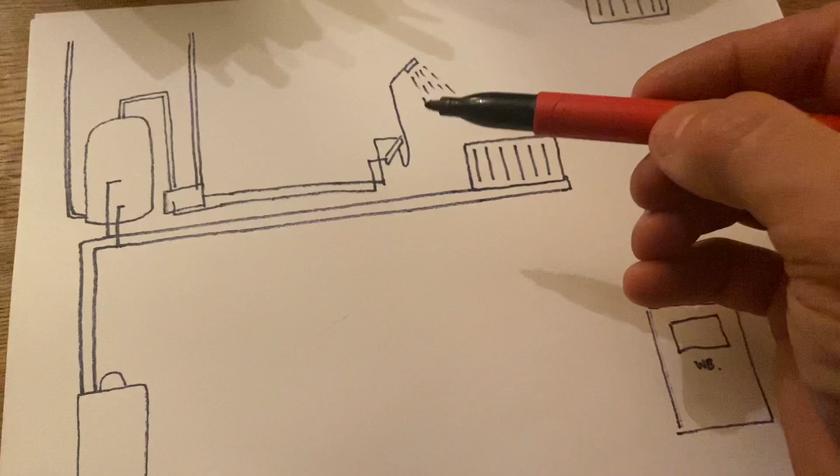This hot and cold here are going to pick up the hot and cold pipework which is in the room below, in the kitchen basically, off the new boiler. Now, rather than take the flow and return all the way through the house, which was quite a long way, to connect on with the heating circuit here in the airing cupboard, we took them from the boiler to connect onto these two pipes here. If we imagine we cut them there and then connected these two onto the hot and cold water in the kitchen ceiling below, we've then got these two pipes that are unused going all the way to where we need them in the airing cupboard.

So we took our flow and return from the new boiler, if I can draw this - it was closer than that, but into our new combi. So that's central heating, flow and return, picking up these two that used to feed this shower into the airing cupboard. This pump goes, and then these two here just connect onto the heating circuit where we need them. So now we've got our central heating circuit from the new boiler coming along and connecting into our existing heating circuit.

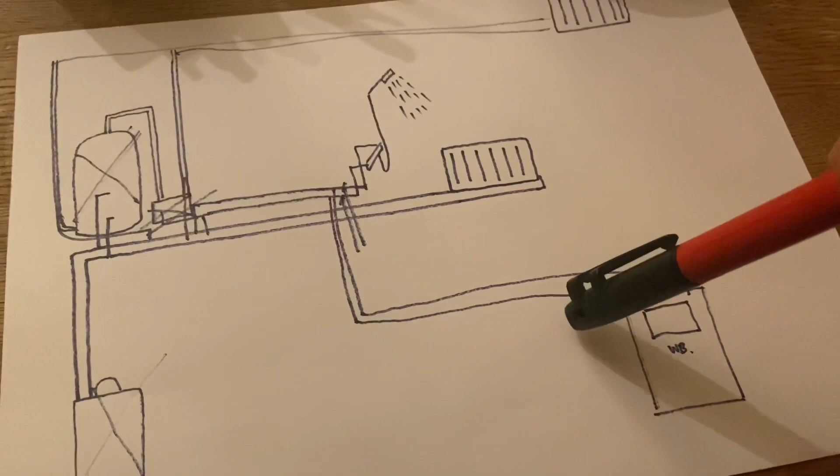Right, ignore this drawing for now. This will all get explained later on in the video. What I wanted to say, and what I missed off the intro, is that I did a live stream from this job when we started it. So the first half a day where I was explaining the job from the start is on that live video. This video starts a little bit into the job, so if you want to see that once you've watched this video, I'll put the link to the original live stream in the description, and then you'll get the whole job.

Hope that makes sense. So I'm just having a bit of a look at where the boiler is going to sit on the floor. It has to go on a flat level surface. I've marked it out roughly where it's going to go, but you can see the level's way out, sitting up about at least 10 or 15 mil. So we decide now whether we put a slab on it or whether we pack the jig off the floor.

And that's because the boiler rolls onto that jig and the pipe connections are on the floor, aren't they? So exactly, it's got to be... If it's not sitting square, what it means is as the flue goes through as well with its natural fall, it will mean that we'll have to accentuate that fall even more, because we're actually going to be going out like that. So we have to be a bit careful what we do.

It might be we've got enough height, haven't we? It's just set a slab, I guess. Yeah, so the pipe's going to come out the back of the boiler up.

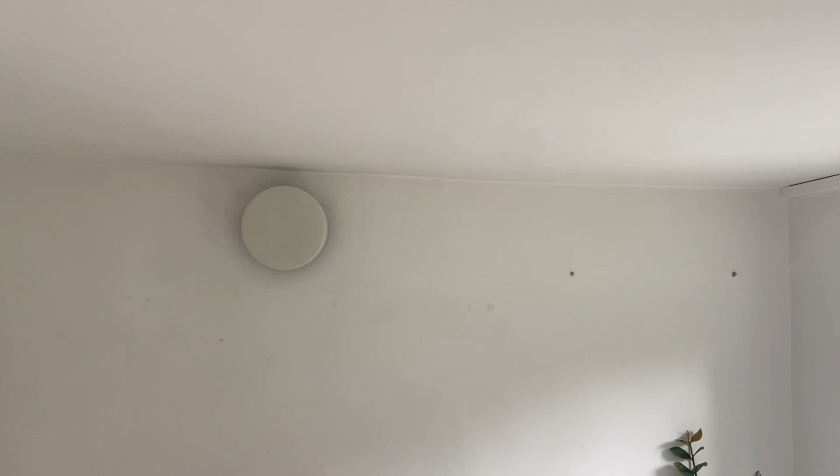We're going to pin them to the ceiling, that's what the customer wants. We're just deciding whether we come straight down the middle and use brass hospital clips to make it look nice - maybe she'll think of it as a feature when she sees how nice the pipework is - or keep it to this side because she's already got some pipes here, and then she can box it all in.

But yeah, we've basically got to come across, because this is a flat roof, across and through, to get us up into this void, and then we can pick up all our pipework, heating and hot water from the bathroom above.

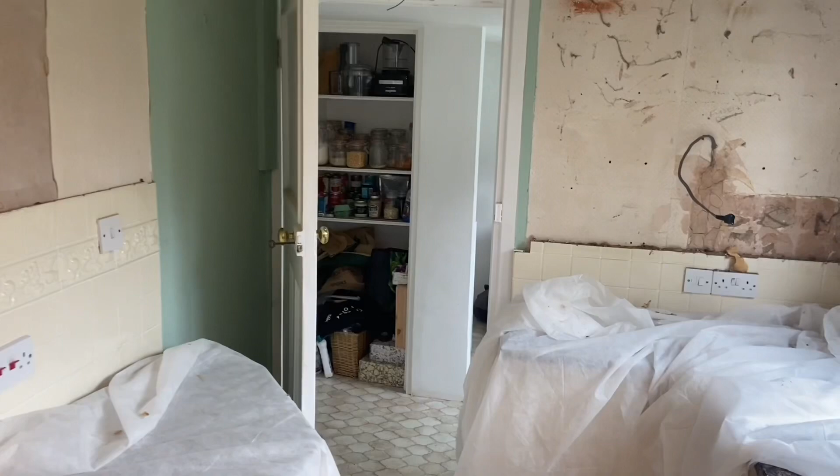We spoke - obviously this kitchen's going to be huge - about different locations for the boiler. She didn't want it anywhere in this room. Her bedroom's the room above, and she didn't want any noise because she says this boiler keeps her awake at night or wakes her up in the morning. So she wants it in that room out of the way. Obviously it's a flat roof, so there's nowhere to take the pipes, and that's the solution we came up with.

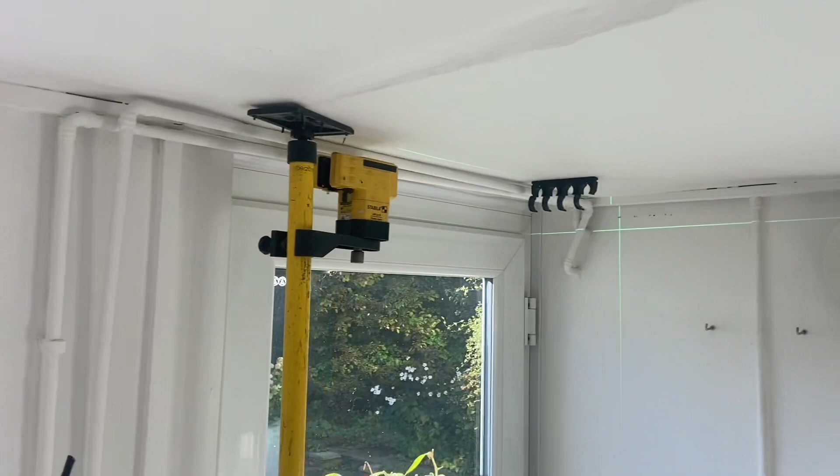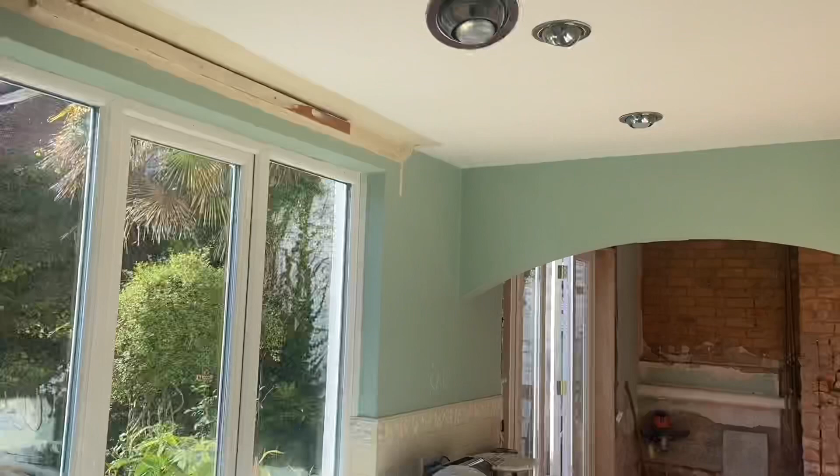Right, double laser gang - Ben's got the floor jig on, he's put a slab down, and he's just marking out his clips. So we're coming up the wall, across the ceiling, and then I'm doing these clips here. I'm going to drill through the wall there, so I've got a dog leg down to get under this cable - there's like 4 cables in that trunking to get us through - and then we're going to come through in here and then go straight up and pick up everything in here.

Are you worried about getting onto these old pipes, seeing the state of the soldering? Well, that's what I mean about stripping it all back. Don't look too clever, does it, some of these?

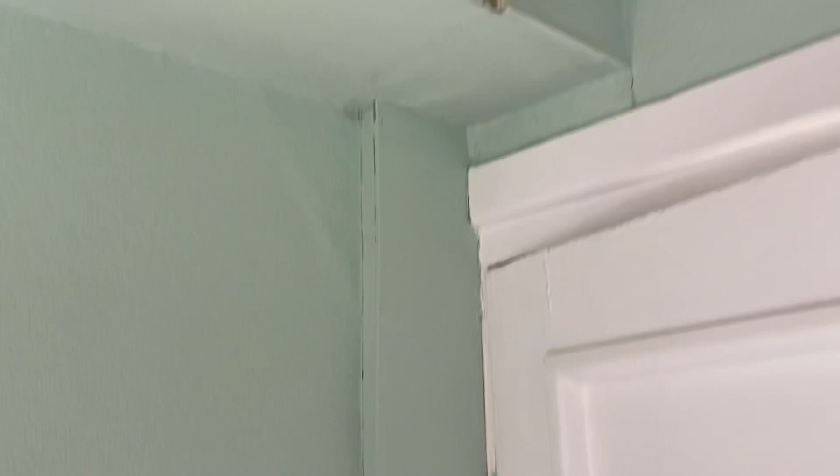We've got enough visuals on it, so we'll just have to watch it, have a look at it, test it and see what happens. Just look at that one at the back there. Well, this one's leaking, okay now - look, which one - right in that corner. I touched the pipe yesterday and it started leaking out. It's going to, isn't it, if I touch it? Oh great, so all he did was touch it and it started leaking. We're screwed. So it worked out so far.

You see these two 15mm here with the Speedfit, that's the bathroom towel radiator. So these two 15s here that then come down, which is these two, they go through to this rad just there. And then the other two, the one that's really black, that's the cold water - you can always tell the cold because it's the darker pipe, the other's the hot.

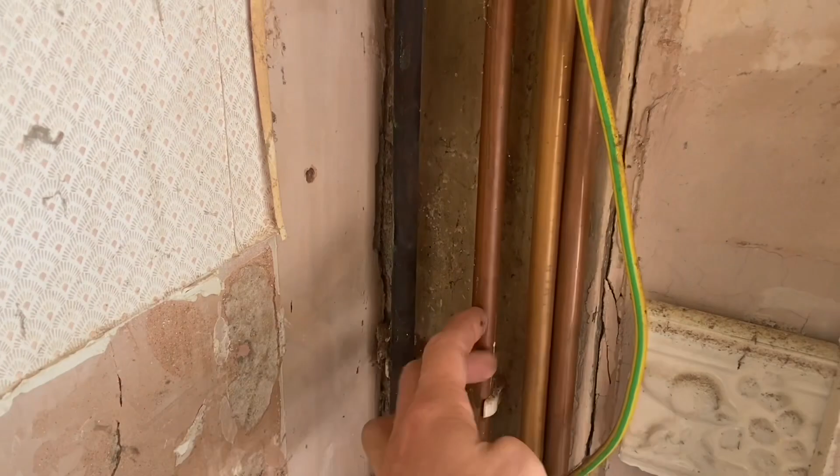They do the kitchen sink, here's the TCP - it's got a bad throat. Obviously goes up to the bathroom, and then they also come across at high level there to do the utility for the tumble dryer and the washing machine and stuff.

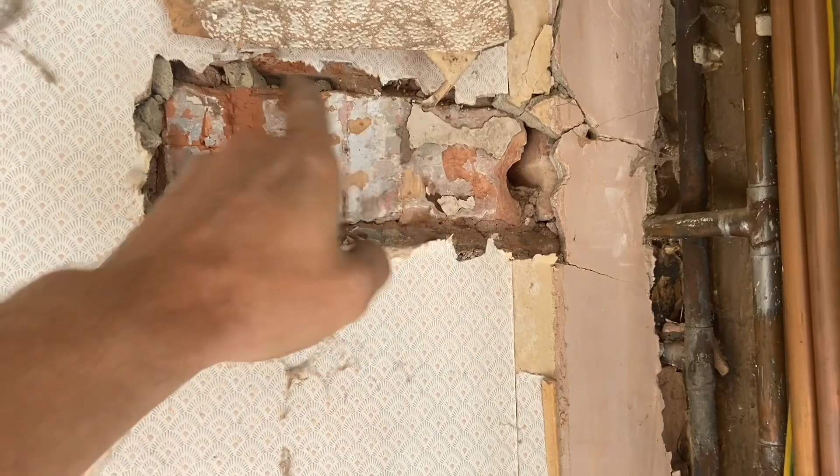So I got my first hole through, it was right on the edge of the brick. And when I got the second hole through, they were trying to join together - they're a bit too close to be fair. So what I decided to do is just take the whole brick out. I've already done them on the other side, so just going to chisel this brick out, got the breaker bit in my SDS, and then we'll just have a whole brick to get our pipes through. That'll make it easier for us, and then we can just fill it in.

Yeah, that's what I'm doing now. So I've just got to get 4 pipes through there, 22mm pipes, up into the ceiling boys, and then all the way along that ceiling.

So Ben's cut the flue out, just leaving the gas pipe, 28mm copper. So just cut that.

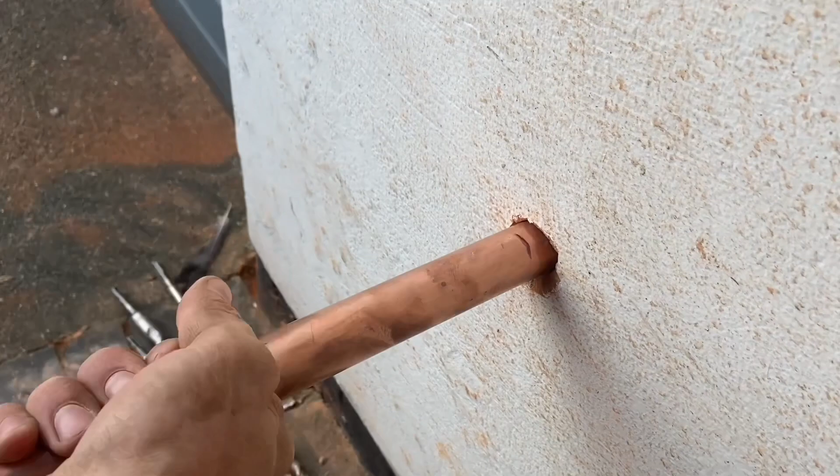Lovely jubbly. We're doing most of this job in press because we need to get it done pretty sharpish. But the gas is quite tight where it's got to go through the wall, and we're soldering it, so that's what we'll do now.

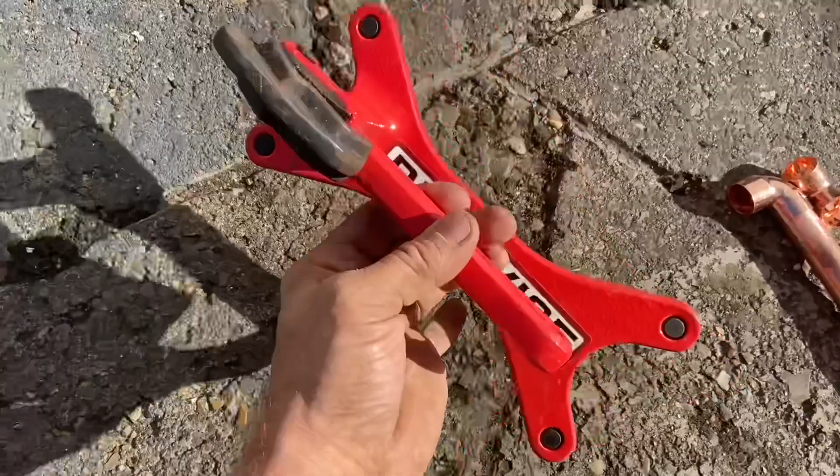Just wanted to show you this. So I've had this, well, this is the second one I got. The first one I got came all the way from America, and it was cast iron, really heavy. They were about 100 quid, but the postage was about 50, 60 quid, so it made them basically unobtainable in the UK. But now they make this one, which is light as a feather, aluminium. And there's actually a distributor in the UK. I don't know if there's more than one, but I definitely know a company called Lavender Heating Supplies, or Lavender Plumbing Supplies, I follow them on Instagram, they stock these.

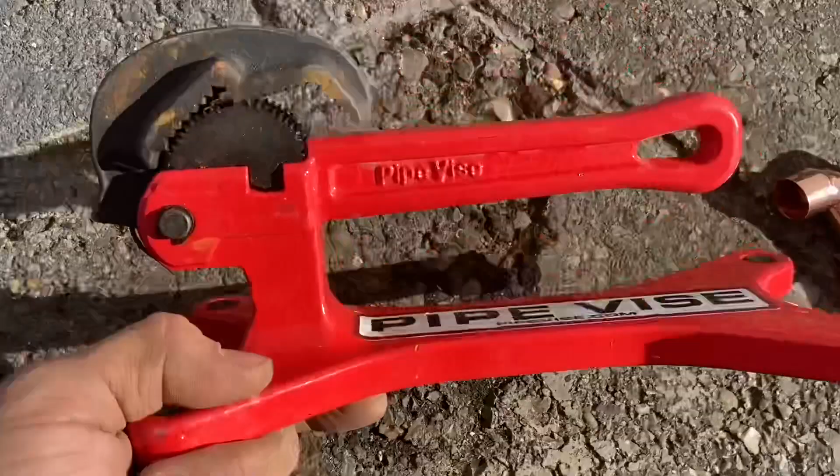It's called a pipe vise. Handy bit of kit. I'm just going to use that to hold my pipe, just in that pipe vise, just to hold it in place. Makes it a little bit easier for me to solder it.

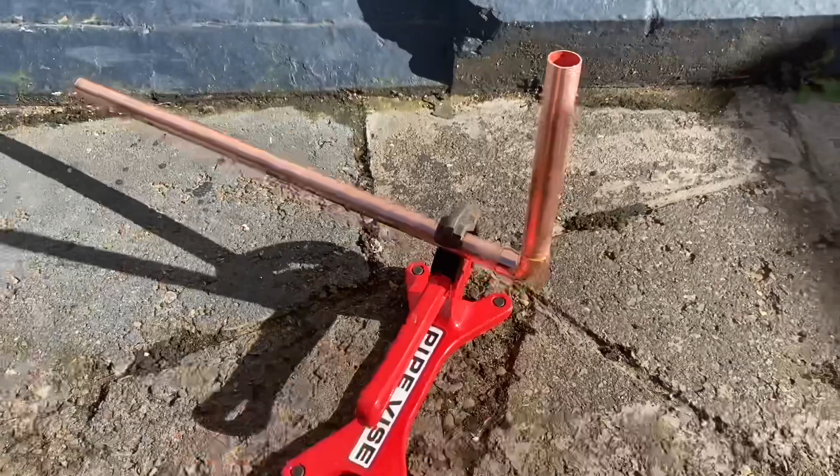Alright, so what I'm doing now is I am cutting these pipes to length and then marking them ready for press fittings, and then we're just going to run these up to above the boiler height. We've got a deaerator going on, a magnetic filter, there'll be a scale reducer on the cold, nothing on the hot, but just wanted to get it in so we can slide the boiler in. And then the gas is going to be along here and soldered and put through there. So I'm just doing that now.

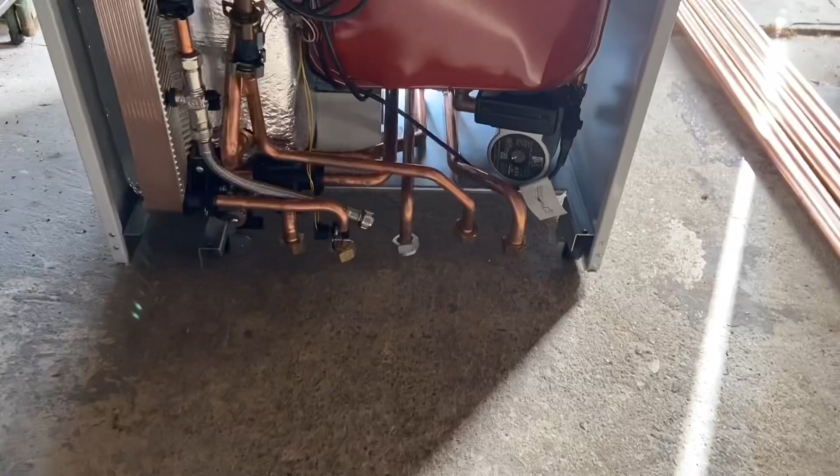When we've got this on, then we're going to roll the boiler in and do the flue, which we'll show you. If you've never seen one of these before, it's floor standing. So that jig that we've got on the slab, these wheels are going to roll on the side of that, and then these connections will end up where our pipe connections are, and they'll just tighten on.

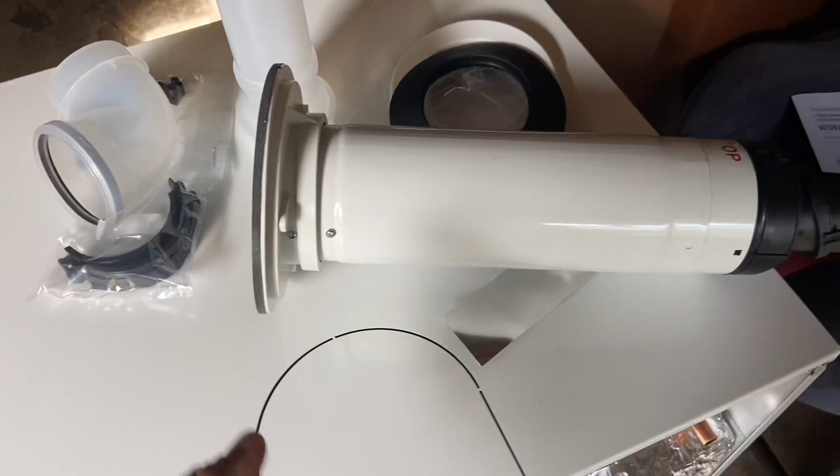But the tricky bit is we've got to fix the flue, that's a telescopic flue onto the back of the boiler, and as we roll it in, it's got to go out the wall and be the correct length. So the flue's probably the hardest part of this. This doesn't just screw on there, it's not that easy. If you look on the inside, we've got this adapter here, so we need to put this on to bring us this way, and then we need to use this.

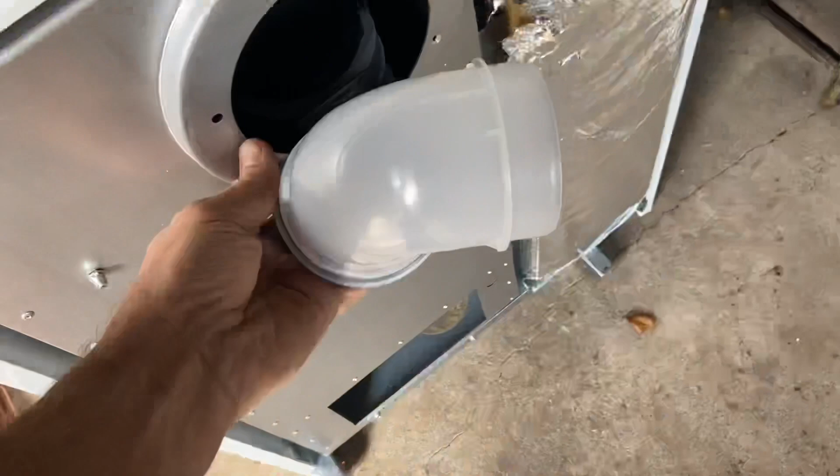Now this is cut for the length that if you were going to put it straight in and do a vertical flue. So we've got to cut this here, put that gasket in there, that's going to go into that, and then that will bring us this way to then connect onto this. So yeah, I mean they're easy once you've done one, but if it's the first one, you just got to be careful.

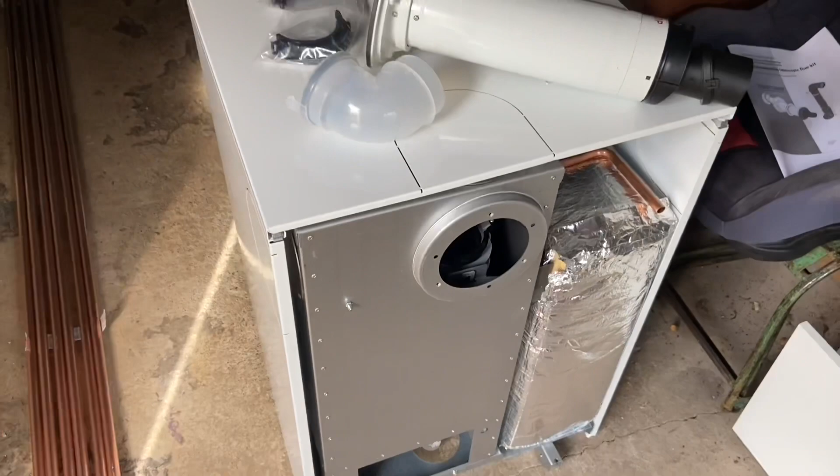Get these plastic collars as well, so once you push that in, it clips over it and screws in to hold that in place, so you can't pull them apart. There's one on there, one goes on there. They give you different ones depending on where you're putting it.

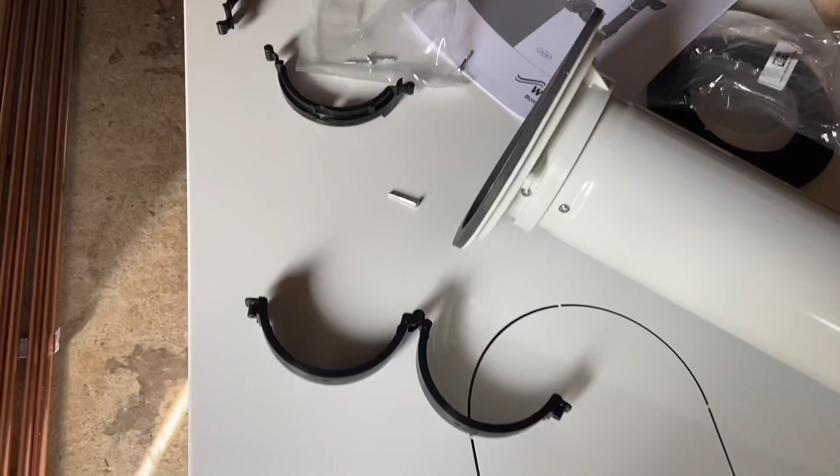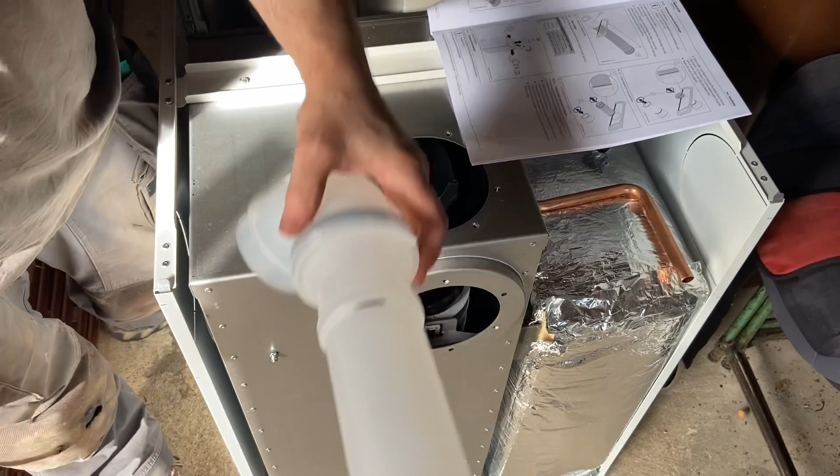Right, go on and explain what we're doing. So we've got a Worcester high flow with a rear outlet flue, or rear flue out the back. We have to adapt the inner part of the flue, cut it down to actually fit the boiler, and then we'll mount the external part of the flue onto it. The reason we took the lid off and the front is because the screws for the actual flue go in from the inside, so you've got to get in here to screw it from this side.

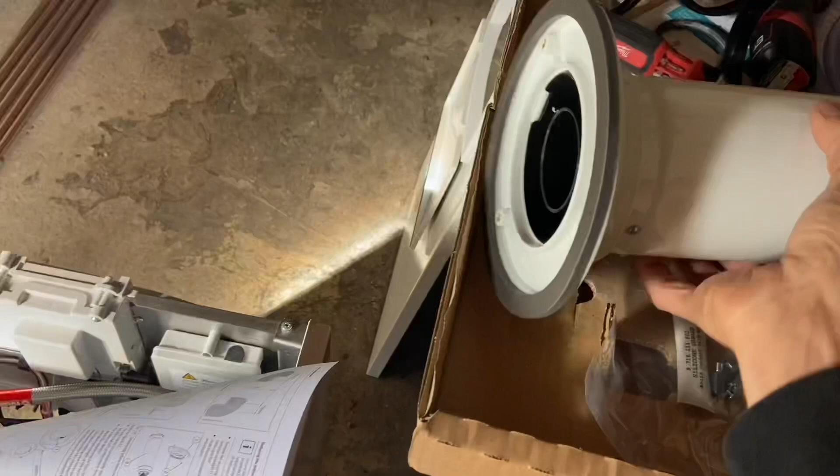You see that? They're captive. So when that's on there, you've got to get these in from the inside, so we'll come in from the front there. Yeah, we're just going to do that now. Pipework's ready, and then when that's on and we're happy with the distance of it, we'll roll it in.

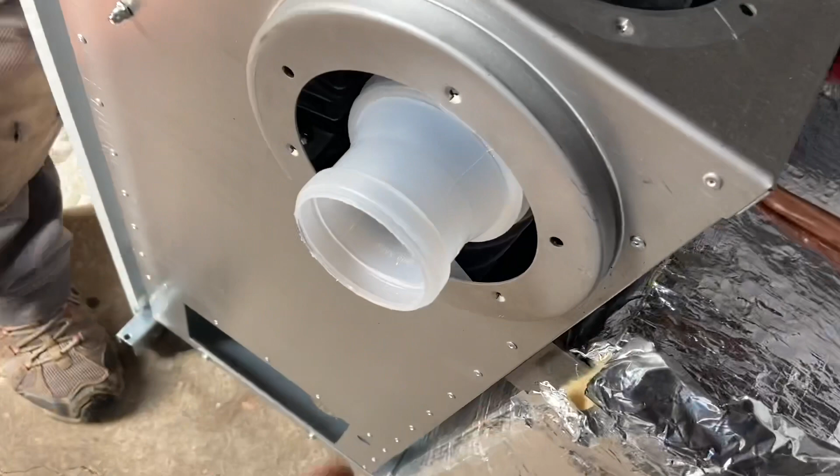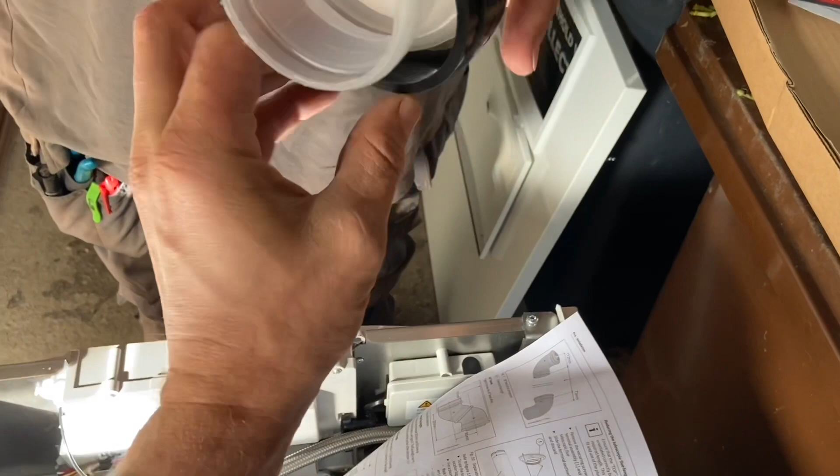So that bit goes round, because you can just pull that out, you see. So take that back out again, out of there, if you can, without cutting your hand open on that. So that, once that's pushed in, do that as one. Now put that round there. Just turn it slightly, and it should go either side of that. There, like that. And then screw that, and that holds that in place.

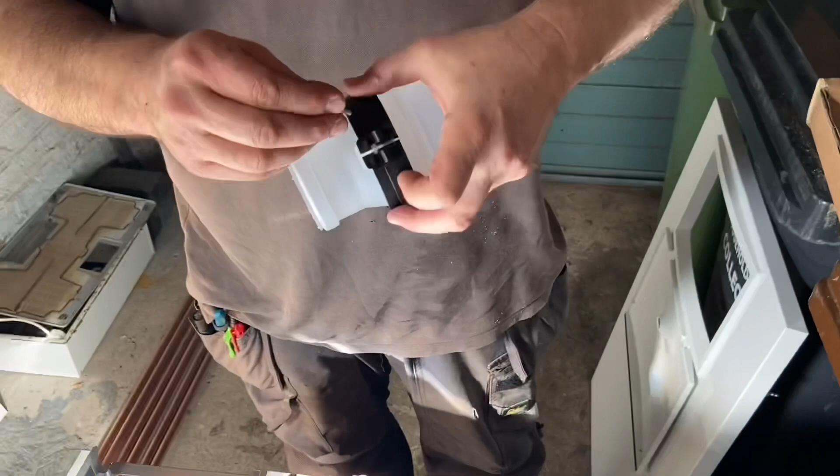I suppose they have to, when they design it, come up with things that they could use for all situations rather than sell different parts. Obviously, just cutting that down, it's not a massive hassle, is it? No, it makes it a bit more versatile, doesn't it? You haven't got to worry about ordering lots of different bits.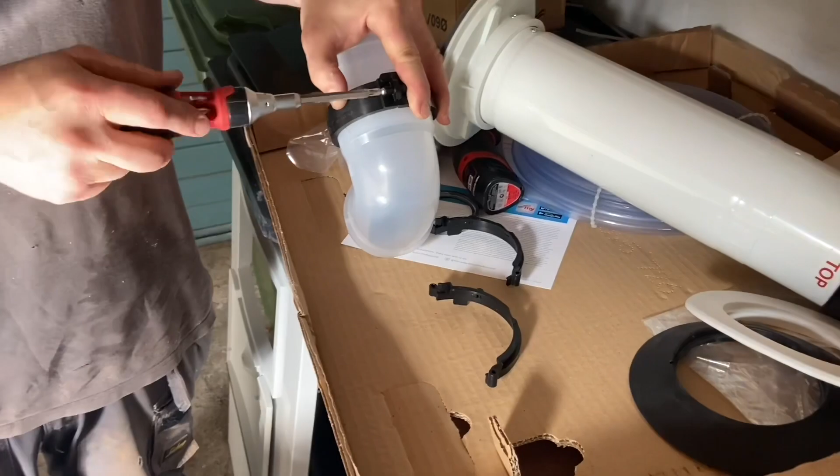So that, push into there.

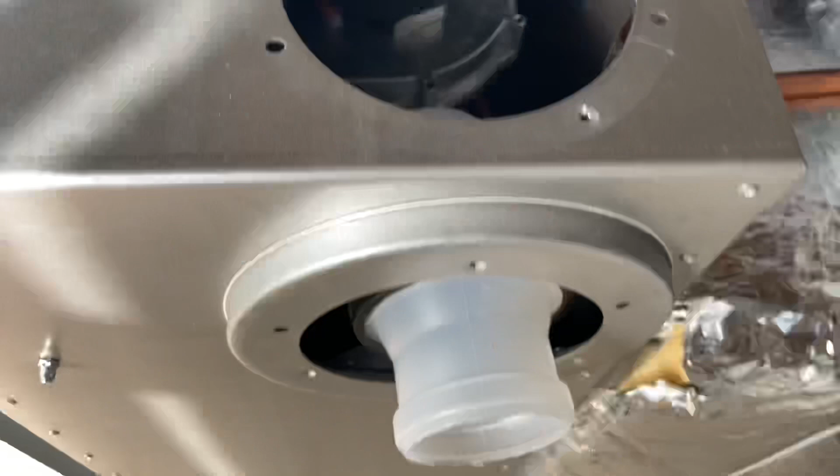Right, Ben's not seen this before, but this is my Würth socket set. He's going to blow his socks off. It takes a lot to blow my socks off. He thinks Wera is the best, wait till he sees this.

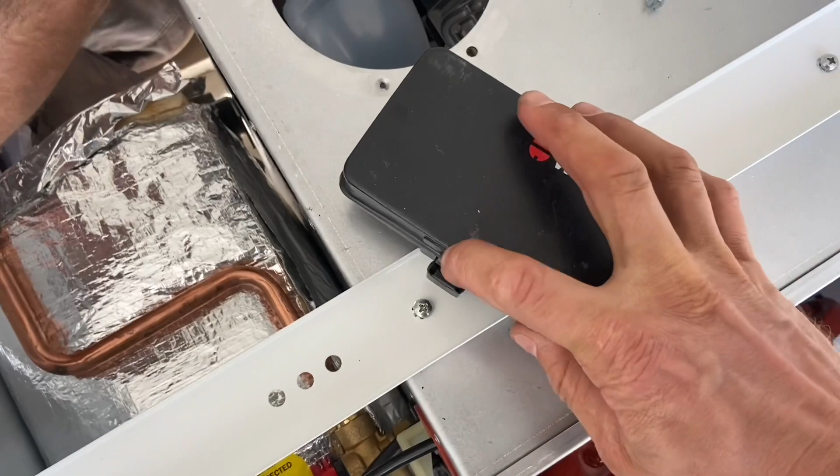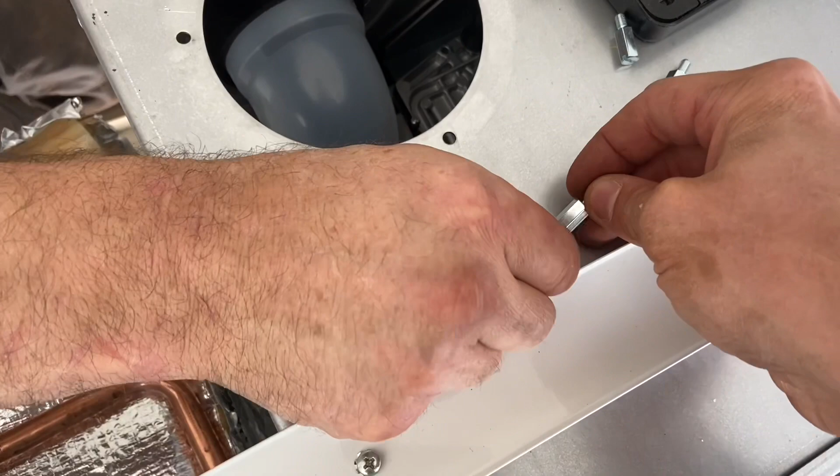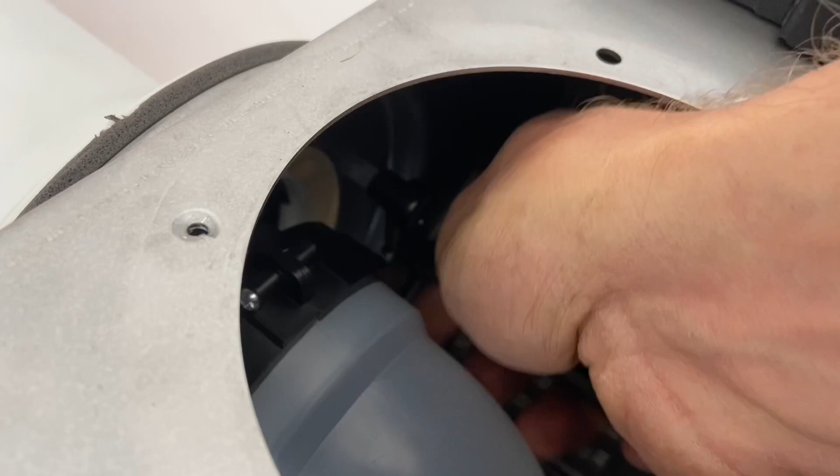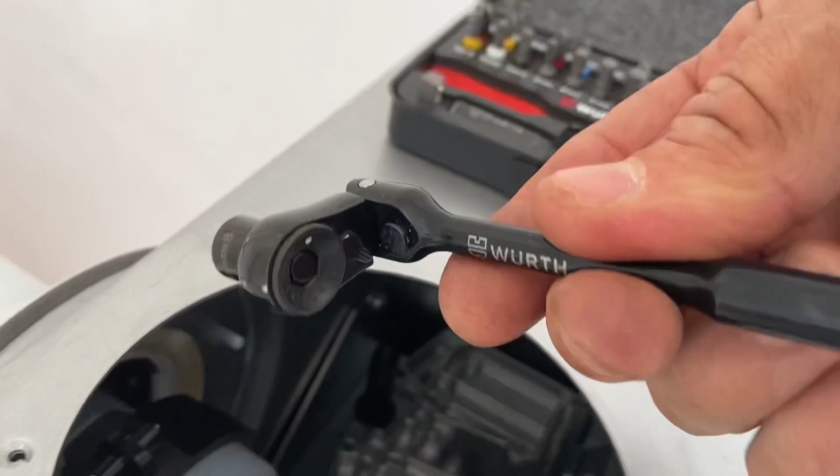Oh, have a look at that. I like the blackness, I like a bit of black. Right, get that out, look at that. Ooh, that's tiny, magnetic. If these are magnetic, it should hold it. Can't do it one end. Should hold that, and then you've got that. Get on the side of it. I think it's stainless, see if I can do it one handed. I can't see it, but... good little set. They're not expensive either, but this is about 30 quid's worth.

So we had a horrible time getting that boiler in. We reckon it was dropped or something because you can see there's like a little bend in it at the bottom there. It just wasn't sitting right on that jig, but we got it in the end. So that's the boiler in.

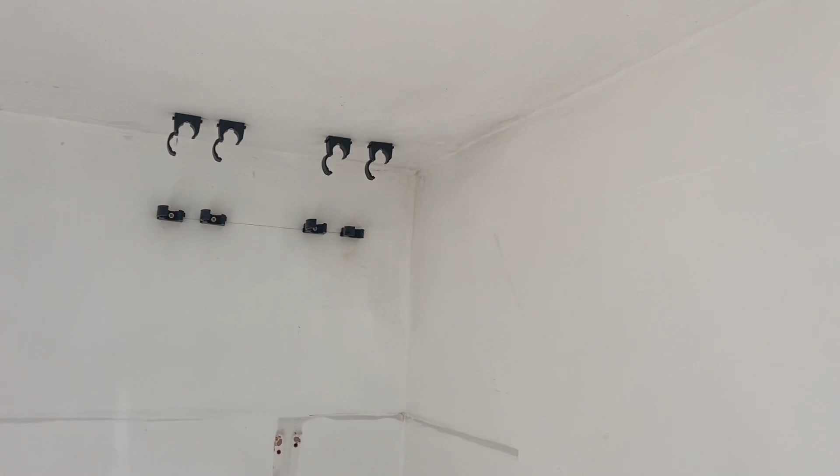Pipe tails up, and then the clips, just putting them in now, there to then go through the wall.

So I'm using the laser level. It's really sunny in here today. You can just see the line, a faint line, if you can see that there. If you had a red laser, you'd have no chance. That's one of the benefits of having a green laser.

So I'm just running these clips now, and then I'm going to get the pipes up, along, and then through there. That's my job. Ben's upstairs, taking the floors up.

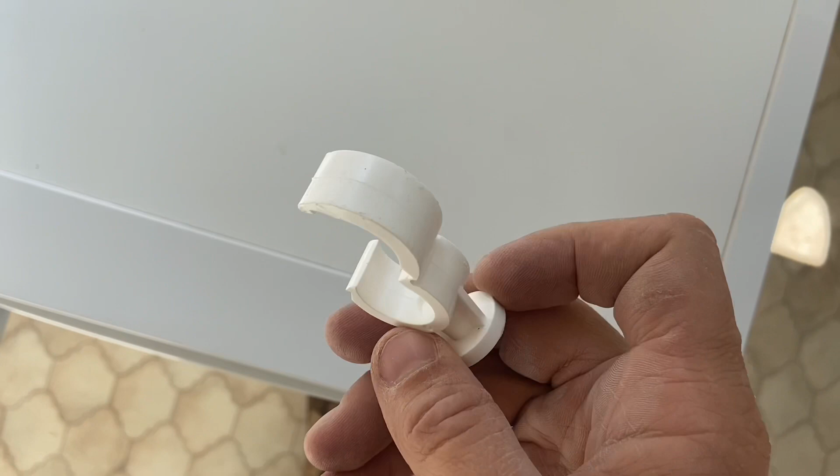So you might be looking at it thinking, why the hell, Pete, are you using black clips? I don't know if you remember at the start of the video, we were trying to convince the customer to have brass clips and make a feature of it, but she's dead against that. She just wants it boxing in. So because we're boxing in, the clips I keep on my van are these ones. I don't think these are made by Talon, or they might be, but these are the ones I've always used. And the difference is, offer them up, they keep you off the wall a bit more. So we use these because they're close to the wall, and I only keep the black ones on my van, so that's why I've used black. It's all getting boxed in anyway, so yeah, that's why.

So I'm going to do that now. I've got a kick down to get below this trunking, so I'll put some dog legs in the pipes. We'll film that for you, and then I'll nip upstairs now and have a look at what Ben's doing.

So you can just see it there. You can actually see it on the end wall there, which is crazy because it is so bright in here, but you can't see it where I want to see it on the ceiling.

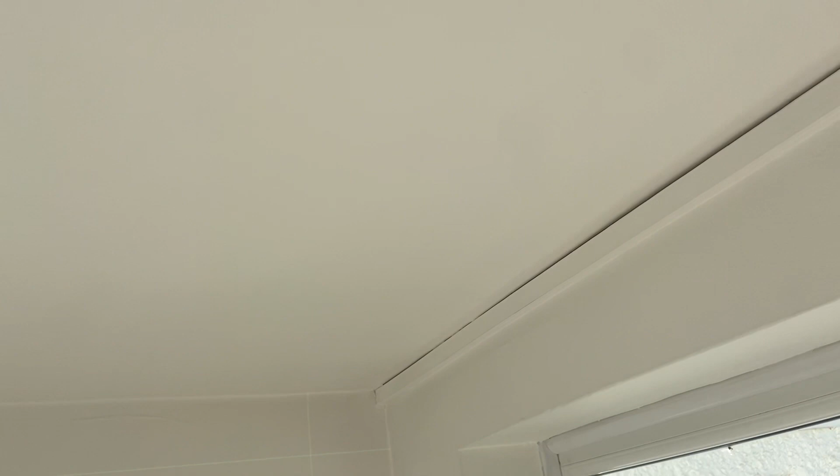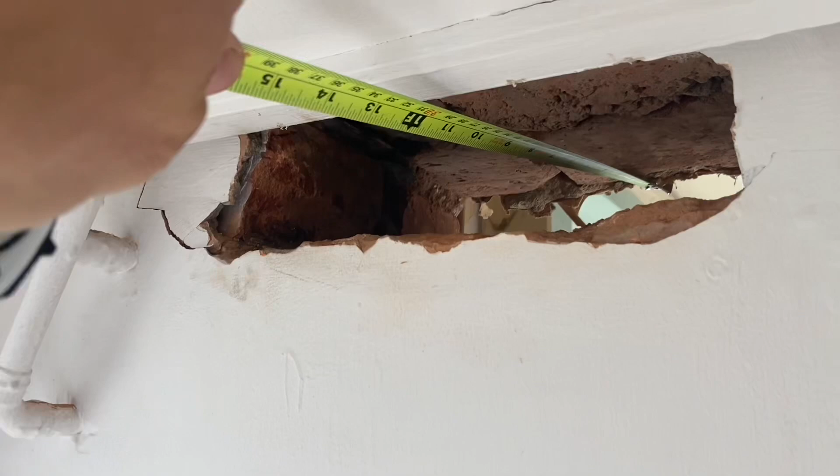Right, so that's all my clips in. So I'm going to measure. I need the pipe to be the other side of the wall, so that's hooked on the brick, and I need to get over that. So what's that measurement? Let's call that 330, and then I want to go up higher, obviously, to get into the clips. What I'll do though, let's just get off the copper.

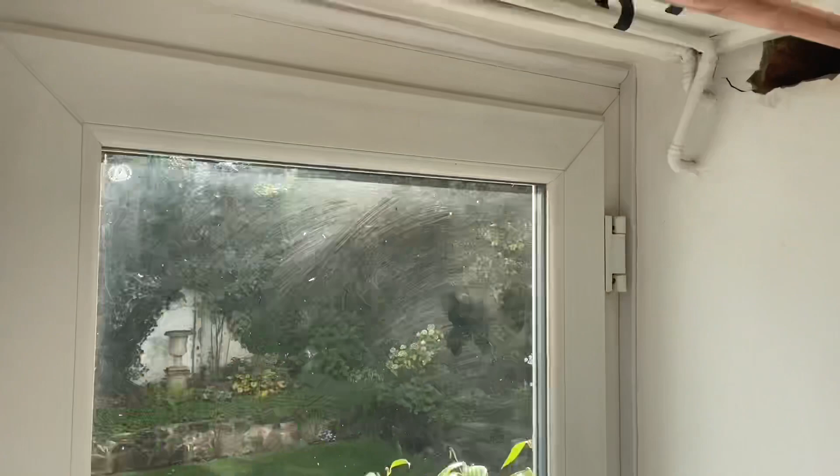This one, just see how much. Do you know what? After all that, don't even need to do it. It goes straight through, so I've not got to bend it.

That's a shame, I was looking forward to doing a bending video for you. Oh, better for me on the job, measuring up to bend all these to get us over that trunking. Yeah, offer that bit, I was just offering that in so I could measure it. Right, offer it into the clips and slide it through.

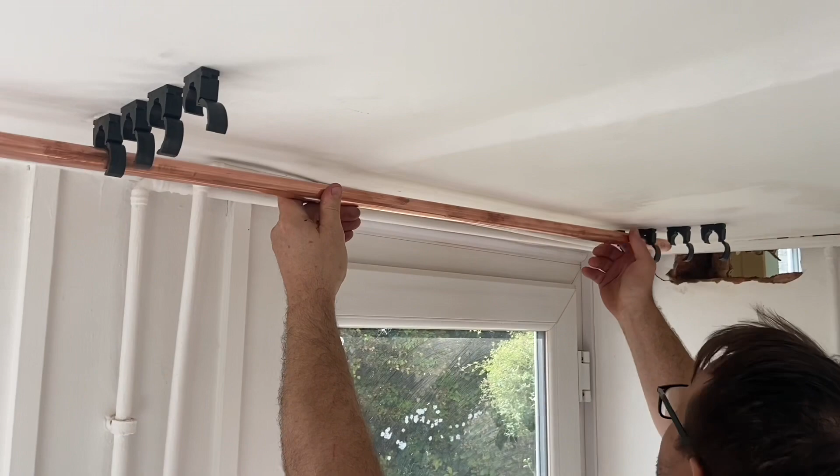Brucey bonus, awesome isn't it? So I've not got to bend a single one. We'll be home by, what time is it?

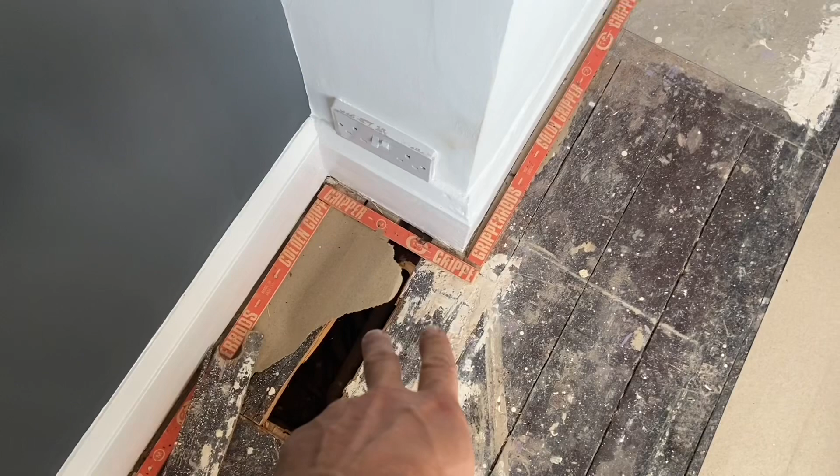So this is the bedroom above that kitchen, and that's the chimney breast down there, fireplace. That's the primaries there, you've left them in at the minute. So the 28 primaries are left in. And I've got a flow and return there, I found under the floor here. Just there, and I wanted to find out I don't need them.

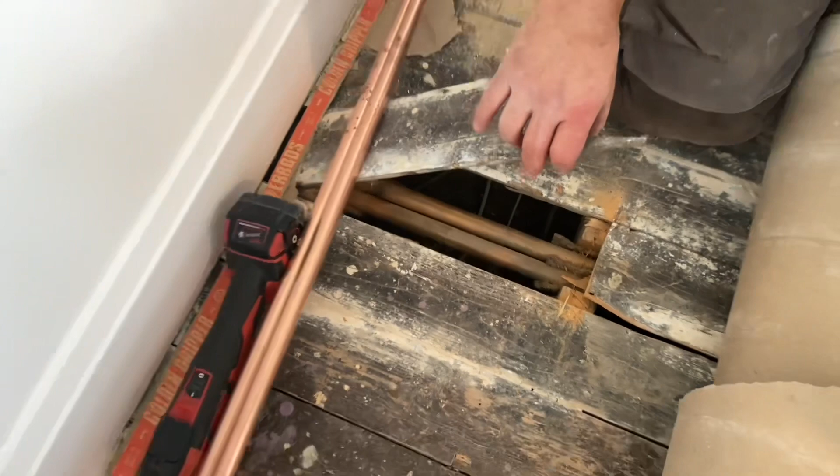The old primaries are under there, so they're the old 28s. They go straight through to the airing cupboard. It looks like they don't pick up anything on the return on the way through, so you should be able to just leave those out now.

We'll just pick up two T's on these, so that's the heating circuit. You're going to pick them up, they're going to come across here and then down to pick up the downstairs heating circuit. Correct, and then we can put this room back together.

Right, he's done well there. Bed's back, carpet's back down.

I'm going off to do some gas certificates this afternoon. Ben's going to be ripping out the cylinder cupboard.

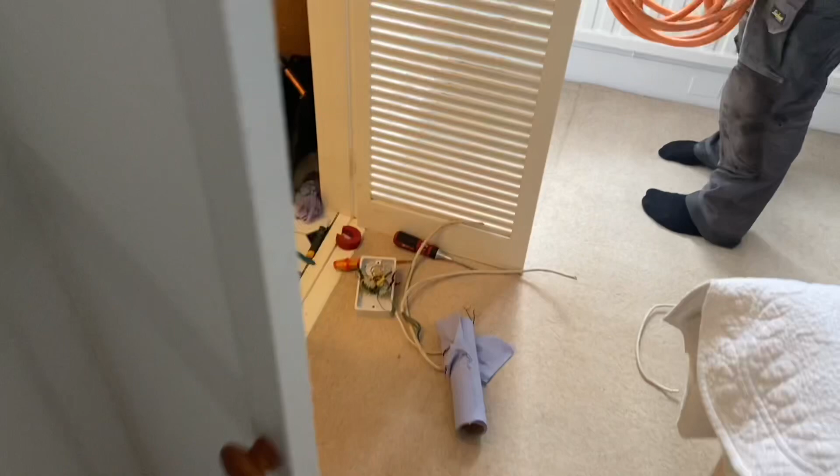Oh, no, I'm not telling. He doesn't want to talk. No, he reckons he's going to get trolled.

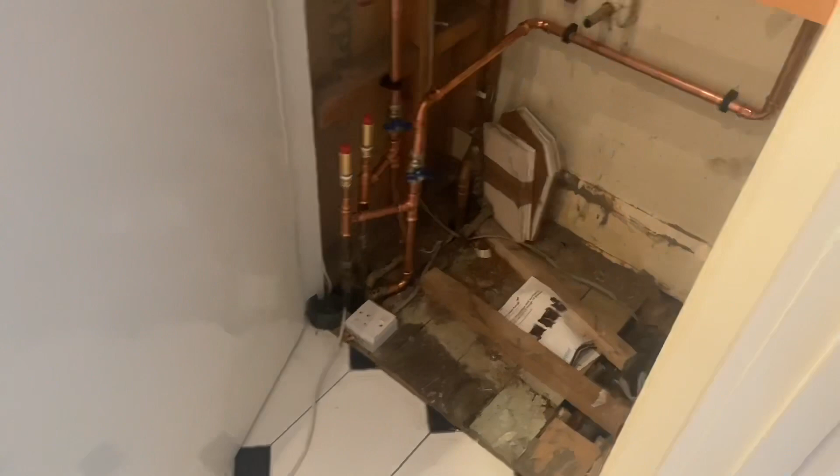Right, do you know what, I want you to explain. Go on. So we've used the hot and colds from the pump shower, which is these two here.

Yeah, pick those up. Hang on, my knee's killing me. Football last night was... hey, a bit closer.

Right, we're using those as a heating circuit. Yeah, so these two come from downstairs, they're now heating flow and return. Teeing with the old heating flow and return, these two, and then go up. Now I've got isolation valves on because we're not going to fill this circuit yet, but this one goes up.

That was the old cold feed into the shower pump, and that one was the cold feed to the cylinder. So now they have become flow and returns to a rad up in the loft.

Yeah, I asked Ben to do a video explaining what he'd done, but he wouldn't do it because he reckons he'll get trolled. So that's redundant now.

Are you going to strip that out or are you leaving it? I'm going to leave it until I know I've got the pipes correct going up into the loft. Yeah, because we don't want to imagine filling the system with water and it starts coming out there - that's when you shit yourself.

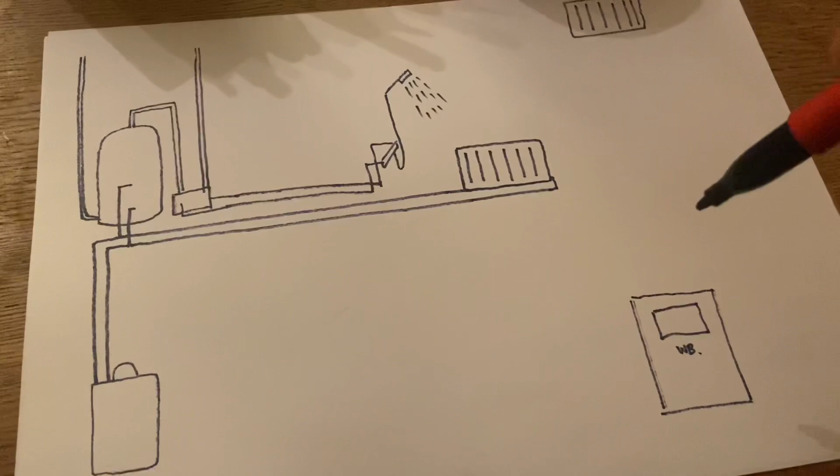Right, I've had to get the pen and paper out for this because I don't know if it explained it well enough in the video. So the system we had: heat only boiler, which fed the hot water cylinder and the heating system.

There was a shower in the main bathroom that was run off a booster pump. Because it's gravity hot water, to boost the pressure and flow rate in the shower, they installed a pump. Now we are changing the system to a combi boiler, so we don't need the shower pump, we can't use a shower pump.

So this hot and cold here are going to pick up the hot and cold pipework, which is in the room below, in the kitchen basically, off the new boiler. Now, rather than take the flow and return all the way through the house, which was quite a long way, to connect on with the heating circuit here in the airing cupboard, we took them from the boiler to connect onto these two pipes here. Because if we imagine we cut them there and there, and then connected these two onto the hot and cold water in the kitchen ceiling below, we've then got these two pipes that are unused going all the way to where we need them in the airing cupboard.

So we took our flow and return from the new boiler, if I can draw this - it was closer than that, but into our new combi.

So that's central heating, flow and return, pick up these two that used to feed the shower into the airing cupboard. This pump goes, and then these two here just connect onto the heating circuit where we need them. So now we've got our central heating circuit from the new boiler coming along and connecting into our existing heating circuit. Are you with me so far?

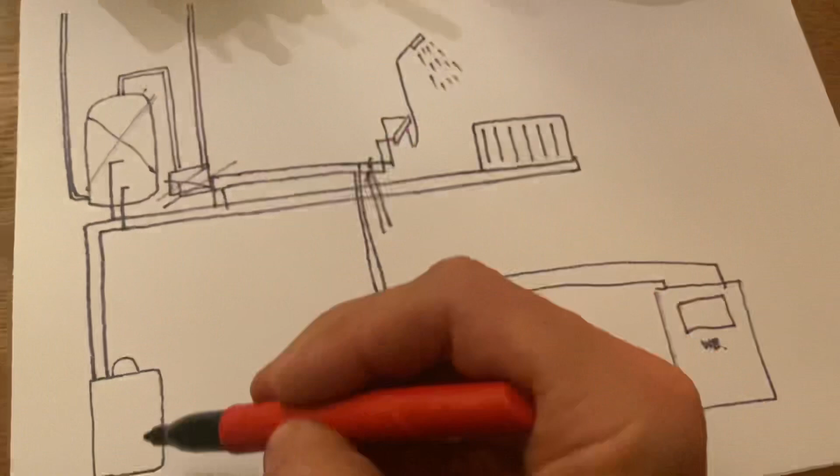Then, because we're running a combi, this goes as well. So that's gone. And this is the old boiler, so that's gone. Now, the cold feed that came down into the shower pump and the cold feed that came down to go into the cylinder, that pipework goes up into the loft.

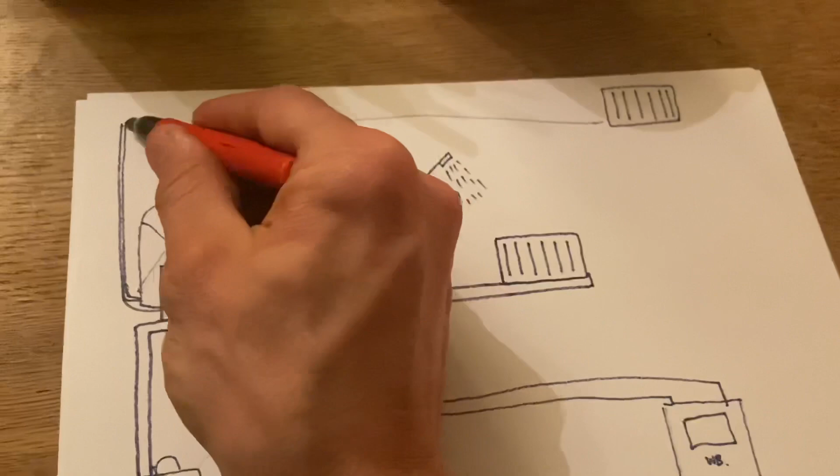Now we want to fit an extra radiator in the loft. So rather than run two new pipes from this radiator all the way along, down and pick up this heating circuit, we also used these two pipes here, connected them into our heating circuit, and then ran them along and picked up that radiator. Obviously it's a bit more complicated than that, but that's what we did. I hope that makes sense a bit better than the way we explained it in the video.

So that's filling me, just filling the system now. It'll be alright. Looks good so far.

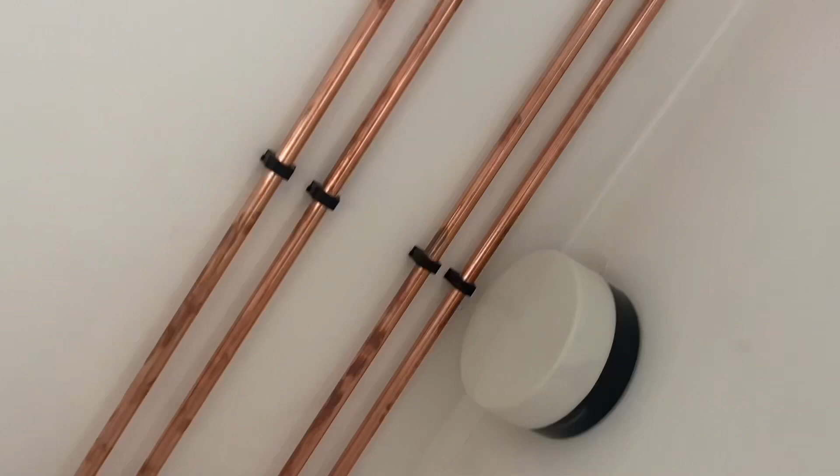So not only are we filling the heating circuit, you can hear that air bottle there, we're also filling this storage vessel there, silver lagged tank. Very good, just got full.

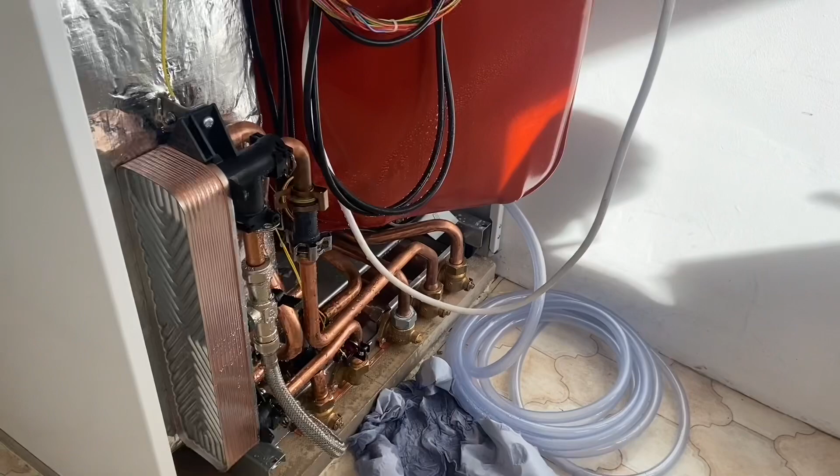I reckon we've got a Friday afternoon boiler here from Worcester. Not only was it all twisted and buckled in the case, but that copper pipe, see that it's not in that clip? So it's just decided to pop. It's all twisted, that is.

What the shit? I'm going to crack it there. No more Worcesters, mate. I'm going to crack it there and pull the whole thing off. Let's just turn this off.

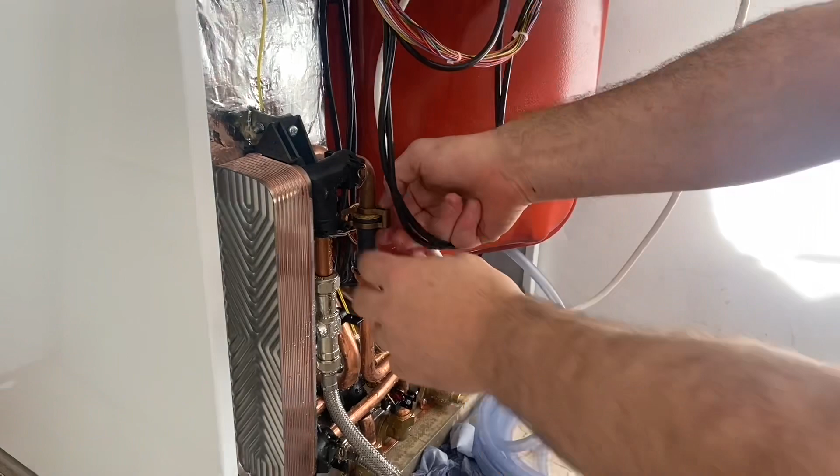Grips. Just wasn't pushed on for properly then, was it? Yeah, it looked like it nicked the O-ring.

Okay. I've already videoed it. We showed it. Stop moaning. We did it the other day.

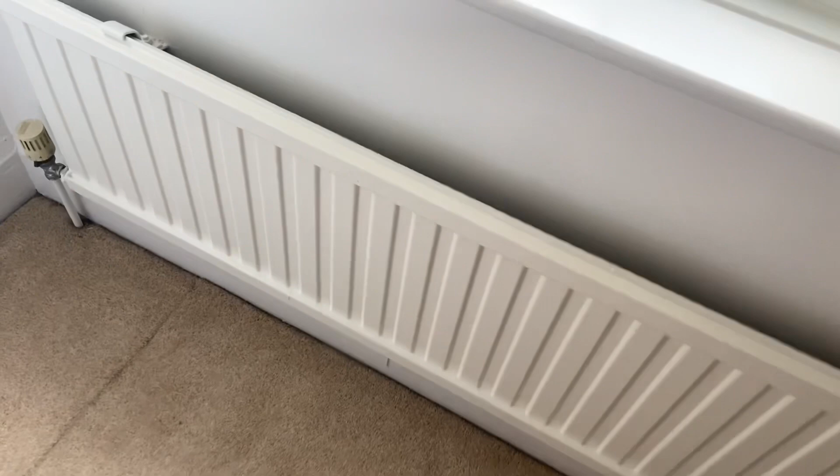This is red hot now, so we've got the boiler running. Ben's just going to explain to you, because we're just fitting the upstairs radiator now.

Okay, so we've taken out the shower pump, and this was the cold feed and hot feed from the shower pump to the bathroom, which is on the other side of the house. And we've come off this, we've picked up the heating circuit, flow and return, but we've also come up and we've got the old cylinder feed, and this was the cold feed from the tank to the shower pump, and upstairs in the airing cupboard, we've got those poking out. So we're just going to connect them onto the radiator upstairs.

So they're just isolated there now at the minute, so the rest of the house is running. When we've connected that radiator up, we'll open those two blue butterfly valves, and that will make that live up there. Very good.

So that's the rad, that little beauty. Just carried that up. So there's the 15mm copper pipes that Ben put in a while ago in preparation for this. They run in here, and so you can see them.

To there. And then there's the old tank. So the cold out. And what was the other one? The hot with the vent pipe, maybe, I don't know. Anyway, so when that tank comes out, the two pipes that he's in the airing cupboard, which is down there, connected, will come up, we'll find them, and then connect them onto those two copper pipes. And that'll be our flow and return to that radiator, which is just over there, if that makes sense.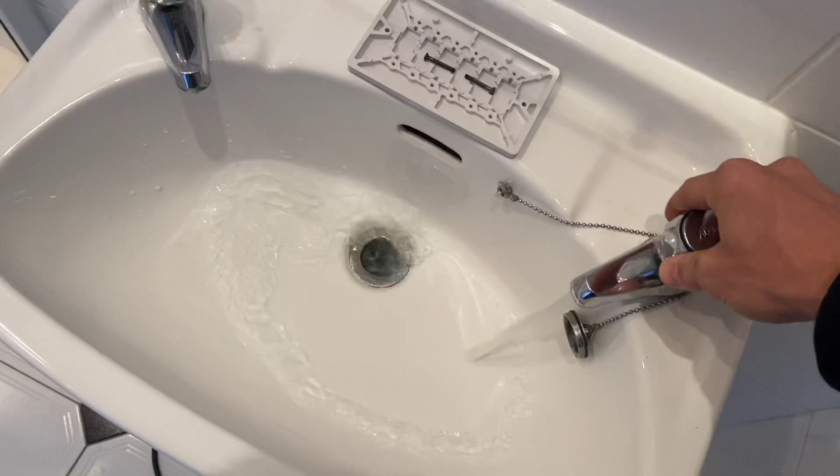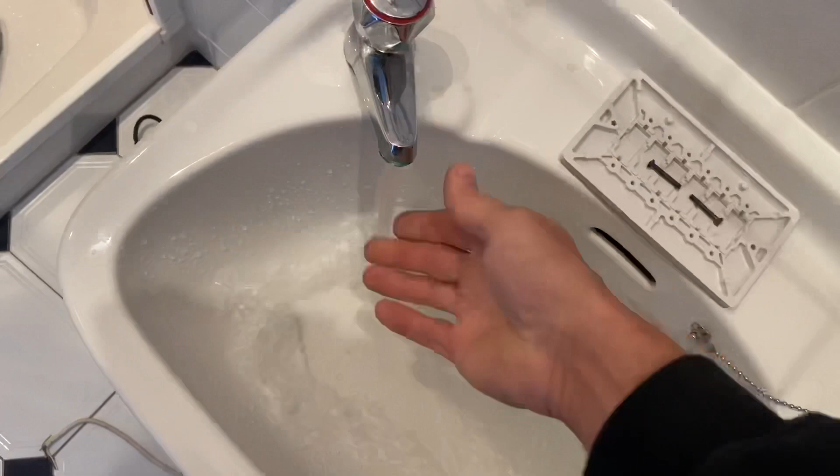Right, so at the minute, the whole house has now got cold water and hot water through the new boiler, which is really good pressure, by the way. That's hot water. But this ensuite shower, so everything else in the house is good, but this ensuite shower has got no water to it. No hot or cold.

So that's both on, and nothing's coming out, so we've got a problem. Now, we'll go up to that where that tank is in the roof.

Have you got a torch up there? Now you explain it.

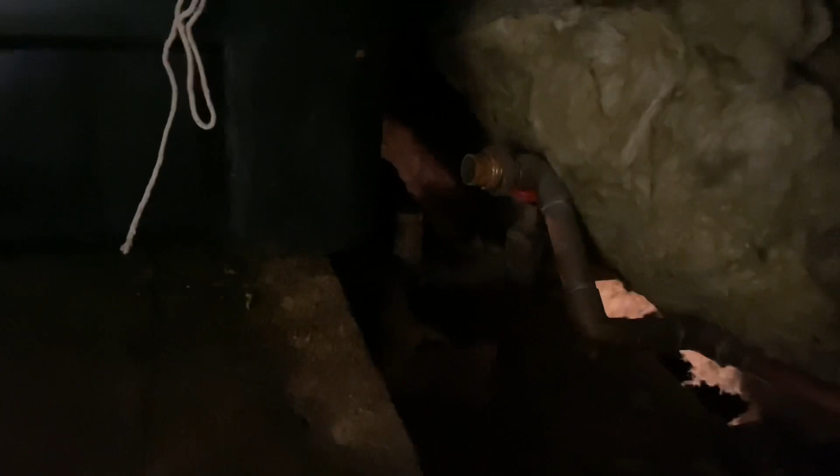Okay, so what we've got on the left hand side are those two 22mm pipes coming off the tank, and we're going to use those to pick up the radiator we put in on the top floor. You can see down there are two 15mm feeds. What we didn't expect was this connection on the tank here - it looks like the stub sticking up was the expansion for the hot water on the tank, and they've teed off it. We can see the gate valve, and the 15mm drop down is the cold feed to that shower as well. We didn't expect that, so now we're going to have to get those live again.

Just about to commission the boiler.

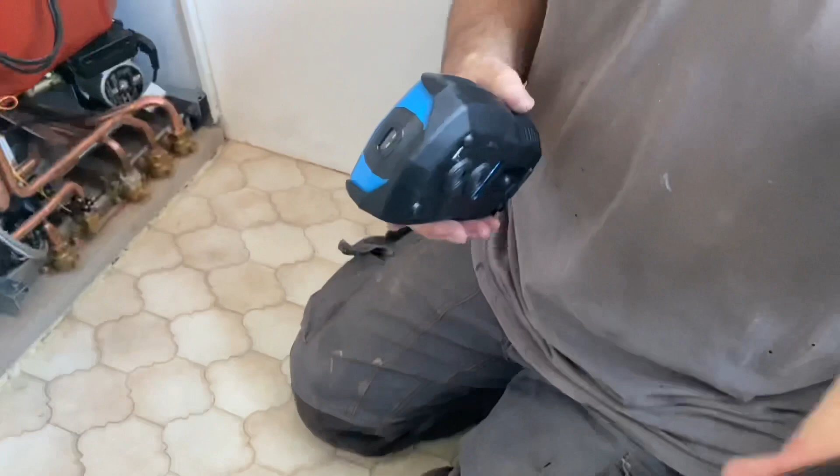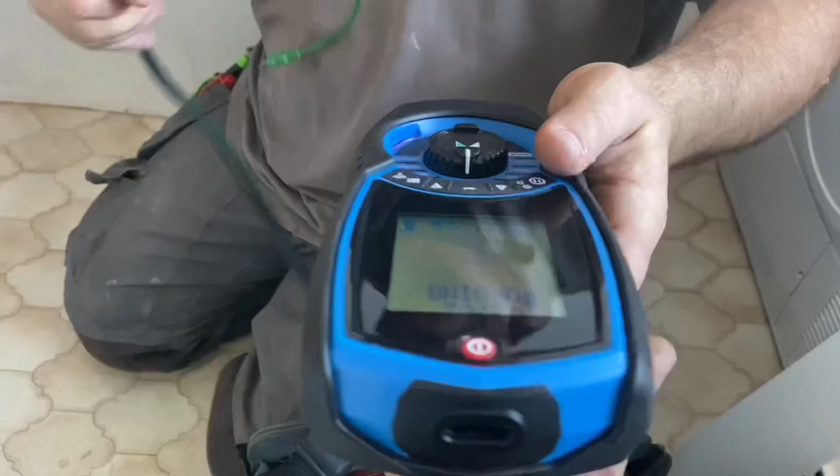That's a nice bag, mate. Do you like it? Yeah, very nice. Got a nice discount on it. Don't tell everyone that. Show us then, what you got? It's a Kane analyzer - the other one was up for calibration and it was knackered, so 550 quid later. That's quite big, isn't it? Yeah, it's quite chunky. It's Kane Bluetooth, 458S, so it works on the Kane Live.

What's the purge times to the minute? Yeah.

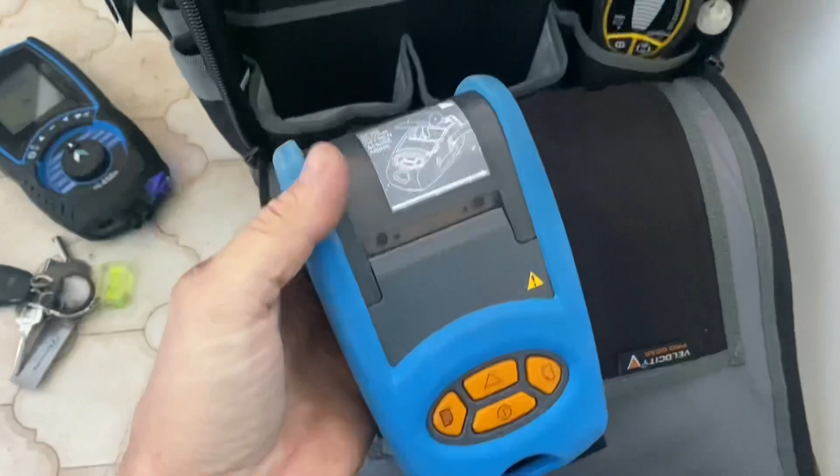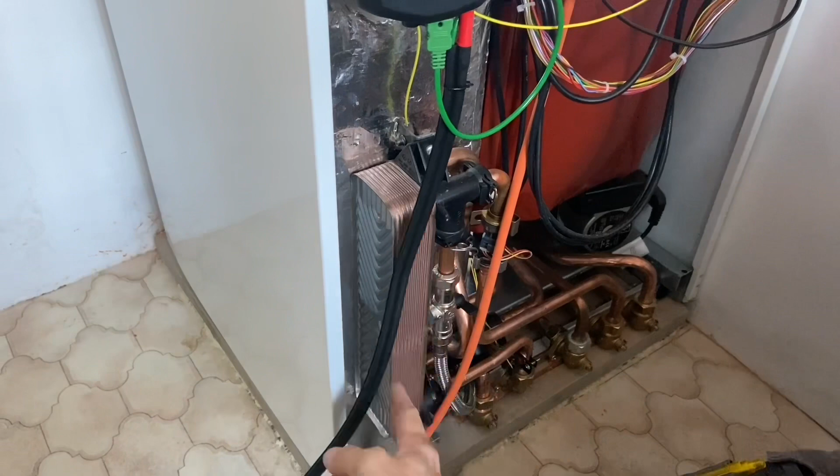Charming. Right, so Ben's going to explain how this works. So we've got a thermal store here that the boiler heats up to 65 degrees, and it takes 13 minutes - 30 minutes from cold to get that hot. So that's got hot water in it. When you open a hot tap, the pump pumps thermal store around this side of the plate to get this plate hot, and your cold water comes through, passes through it to pick the heat up like a combi boiler would. So that's how it works. Then the diverter valve, when you put the heating on, sends it around the heating.

Do you agree? Yeah, sort of. I'm not sure the thermal store goes around the heating though. No, it doesn't - that gets pumped around here, and the diverter valve sends the heat around the heating. Yeah, that's correct. What else have we got? We've got a flow sensor on there to tell the boiler that someone's opened a hot tap, which then pumps the heat from the thermal store around this side, and then the cold goes through it. That's about it really, so we're ready.

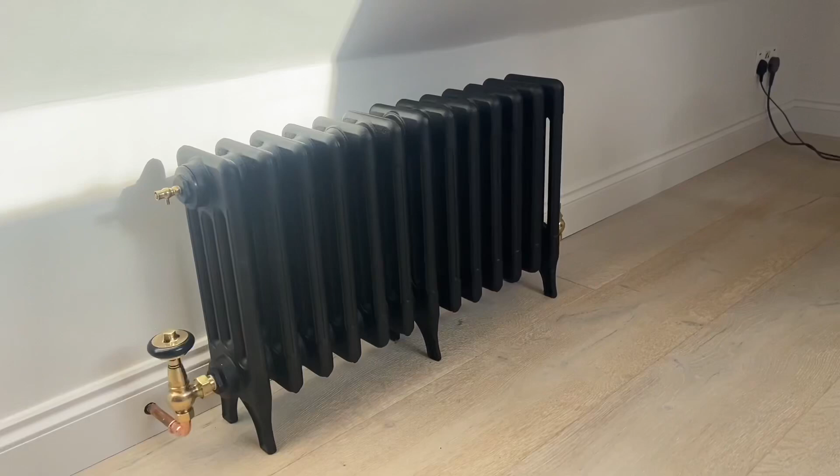Valves make a nice job, don't they? Just starting to get warm now.

So we're done now. That's the old fireplace. Obviously the boiler's gone, the gas is still there for the cooker. Condensate pipe's just going to be ripped out and the flue's going to be bricked up. We've got to get a hot and cold in for an island here, and also a cold supply for a pot filler that goes on the oven there. The ceiling's down now completely, but we've got the pipe work in for the house, which is connected along here to the boiler.

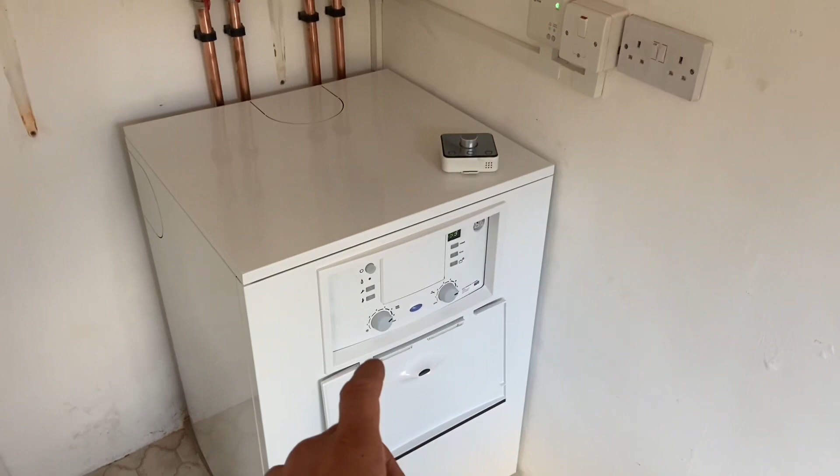We've reused the customer's Hive, that's all working, that's all done. We'll be back when this kitchen's out and there's a channel in the floor - we're going to bring our feed to here. There's going to be a radiator here and a radiator here, I think. That's when we're going to get rid of these pipes in the floor. So this will be week after next, but she's now got a working boiler, hot water and heating in the old part of the house, so she can live here. She's been away for a couple of nights while we did it.